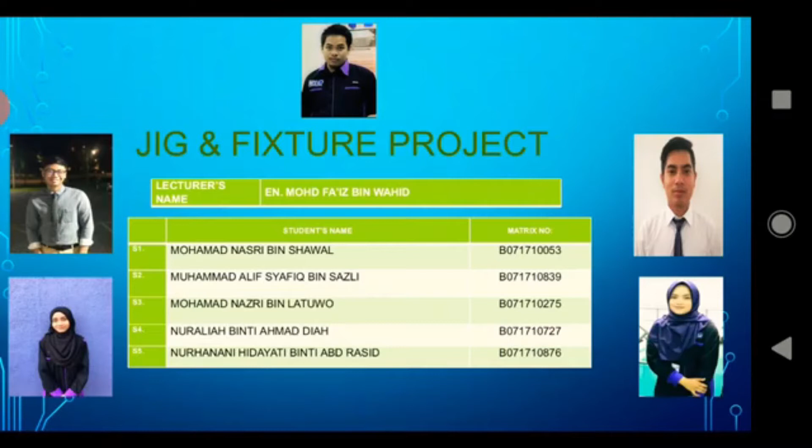Firstly, our introduction. Our group members have shared ideas on the work holder design for the final project. Locating and clamping are the critical functions of any work holder. As such, the fundamental principles of locating and clamping, as well as the numerous standard components available for this operation, must be truly understood. To perform properly, a work holder must accurately and consistently position the workpiece relative to the cutting tool, part after part. Group members demonstrate support for one another as they accomplish their goal.

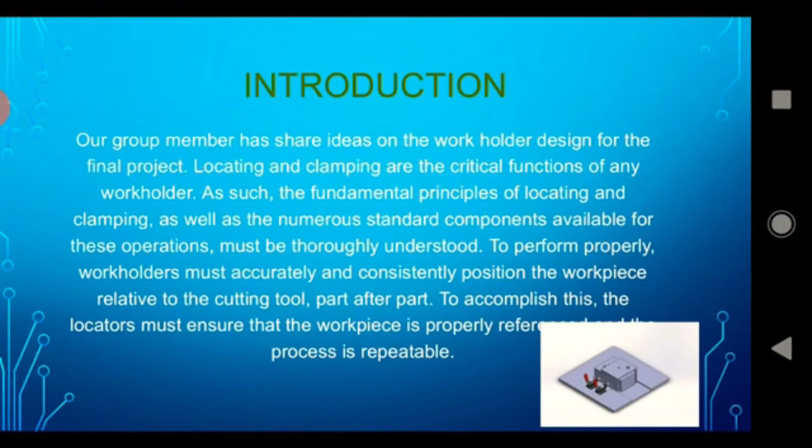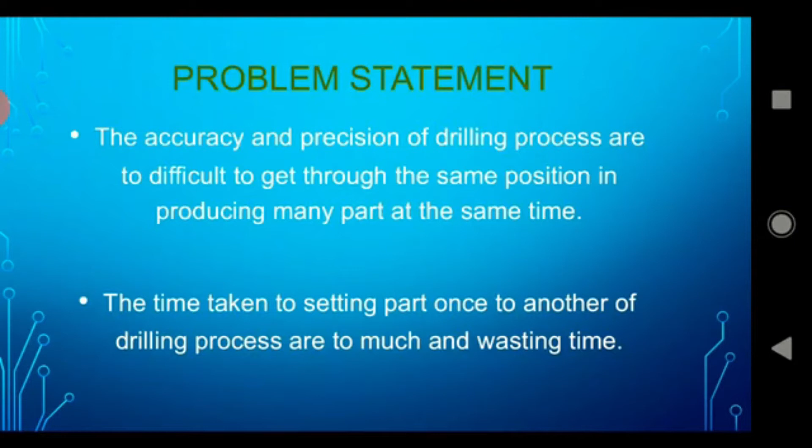Okay, this is our problem statement. As you can see, accuracy and precision in the drilling process are very difficult, as is producing the same position across many parts, and the drilling process takes too much time. Okay, this is our objective. First, produce a jig product that makes the drilling process easier with high accuracy and precision. Second, the time taken for the drilling process is reduced by using the jig and fixture.

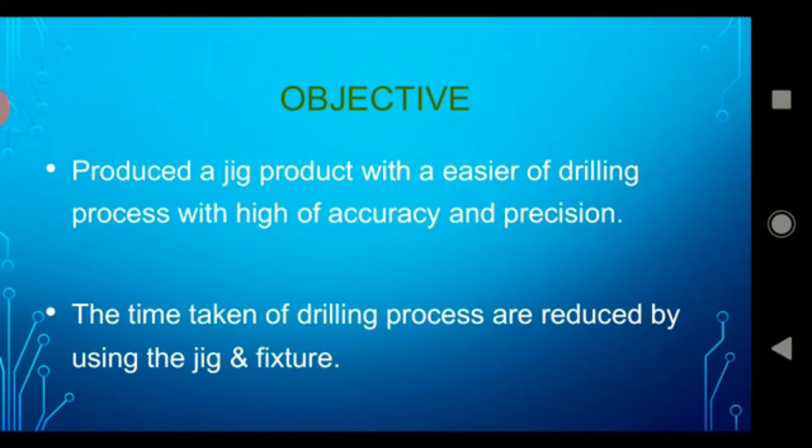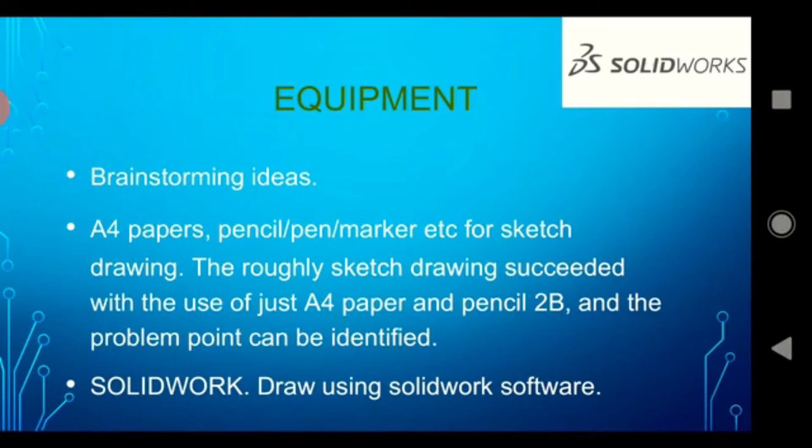Before we start, we did brainstorming and a meeting to manage and develop our ideas on how to make a better jig and how to achieve our project. Then we did the sketching using A4 paper and a 2B pencil, and then the final drawing using the SolidWorks software.

Okay, for the procedure, conceptual design for the jig needed is done by sketching for the workpiece that had been chosen. The sketch is done by following the assembly view and the custom part labels, which are the main body, locators, supports, clamping, and more. Then we do a real drawing in SolidWorks software to describe each component properly.

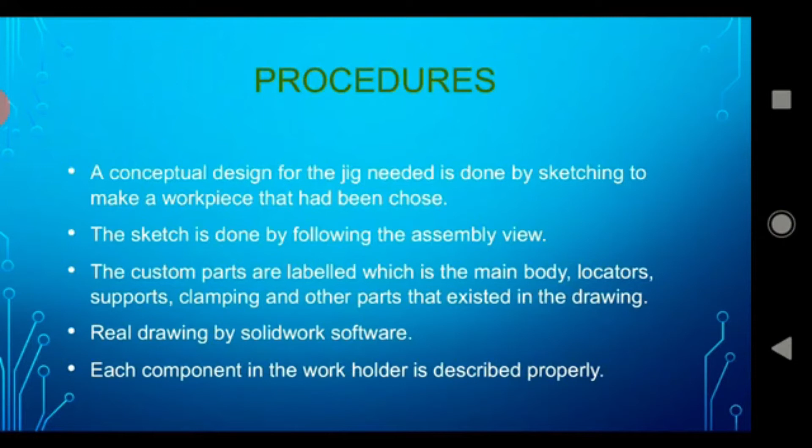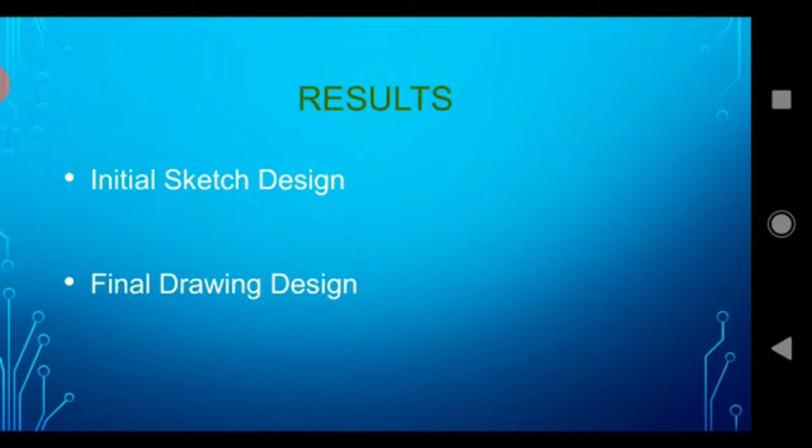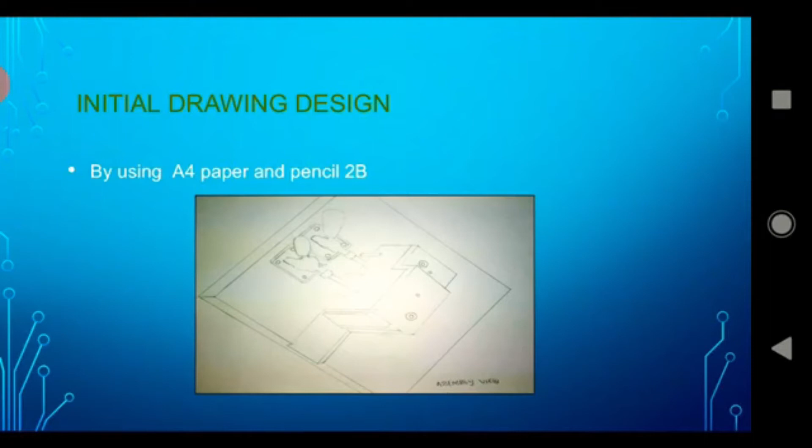Okay, for the result, we have two results. The first is the initial sketch design, which we did using just a 2B pencil and A4 paper. This is our assembly view. As you can see, the rough sketch, the first idea. This is a type of box jig. And then this is the cover side.

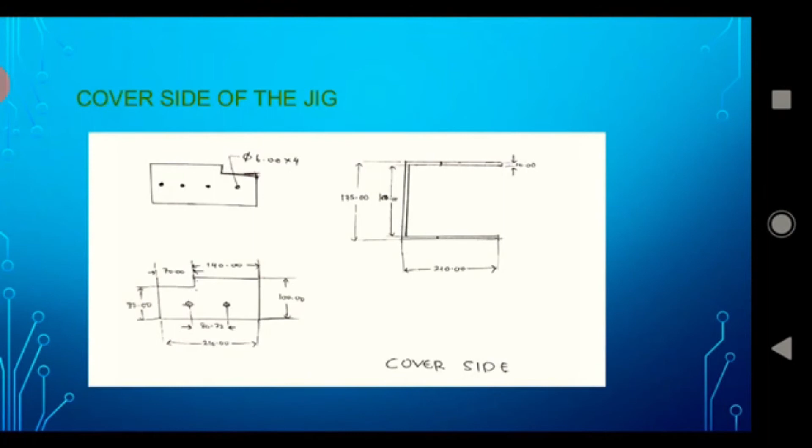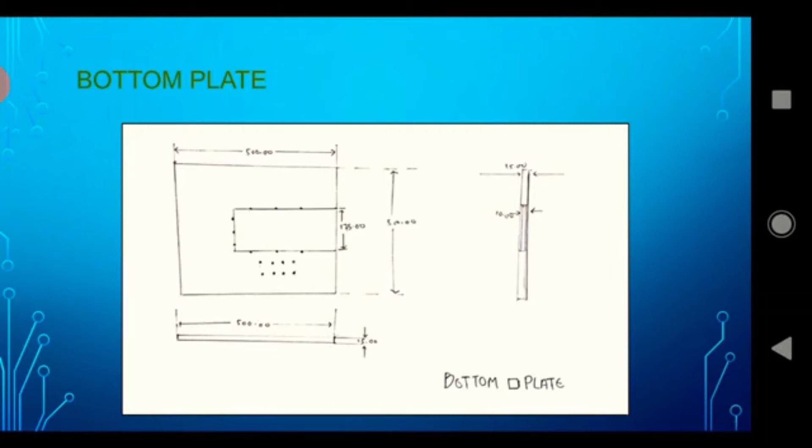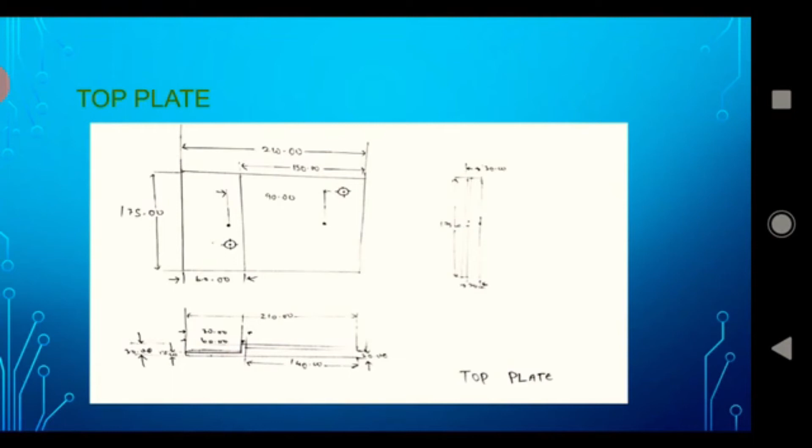For the precision and accuracy of the workpiece, we did the sketch for the cover side of the jig. As you can see, the width, the height, the diameter of the bush, and the others. Then the bottom plate, we use a normal sketch of 500 mm, and for the slope of the side, 500 mm. And then the top plate, we also just did a rough sketch.

And then the final design. This is our final design using the SolidWorks software. We have 9 parts of the jig and fixture, the box type. The quantity for the bottom plate is 1, bush drill 2, clamp assembly 2, cover side 1, screw 8, seating pin 2, stepped dowel pin 9, supporter 4, top plate 1.

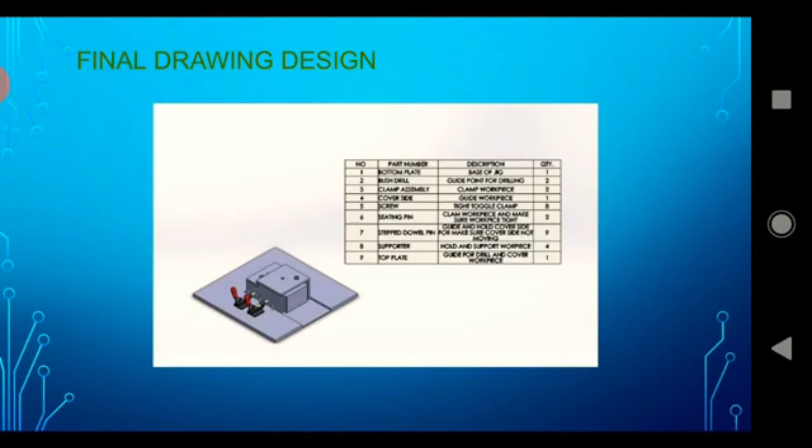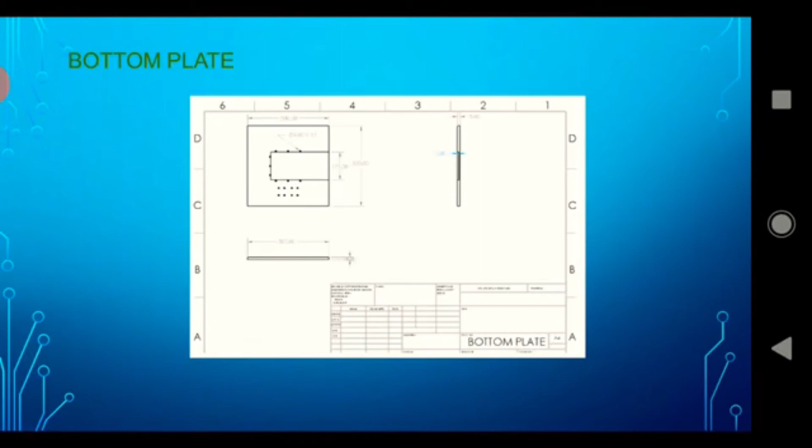For the bottom plate, 1 quantity, it is the jig base and the place of the part during the process. This is the main body, a custom part, as shown in the SolidWorks drawing. Next, the bush drill and the clamp assembly. Bush drill, 2 quantities, guides the movement of the drill during the drilling process; it is a support component and a standard part. The clamp assembly pushes and clamps the part during the drilling process, used as a clamp, and is a standard part.

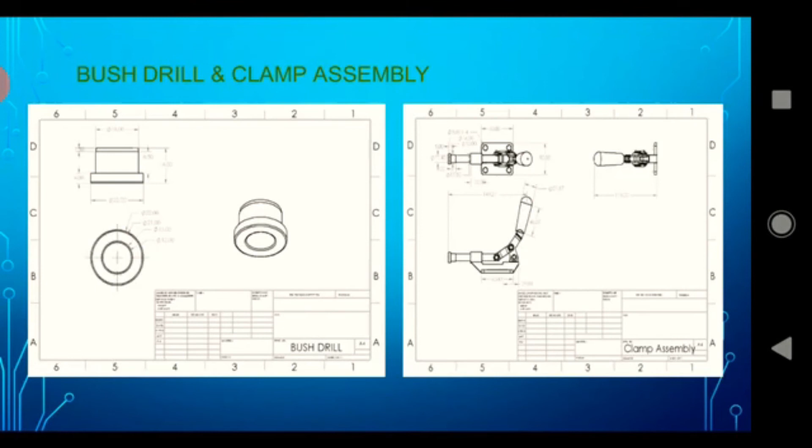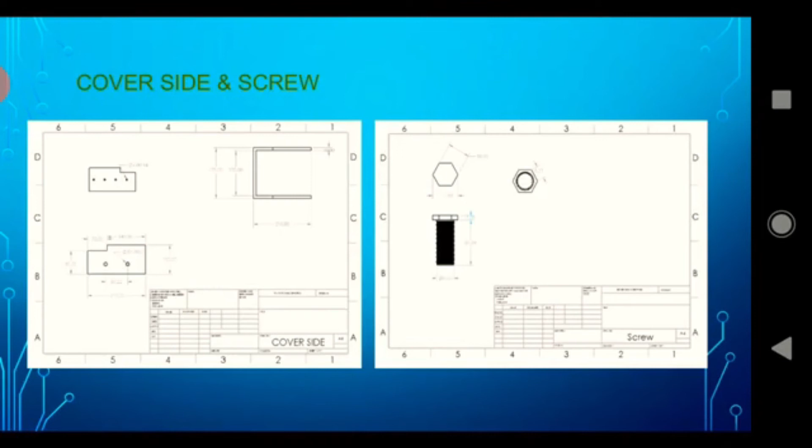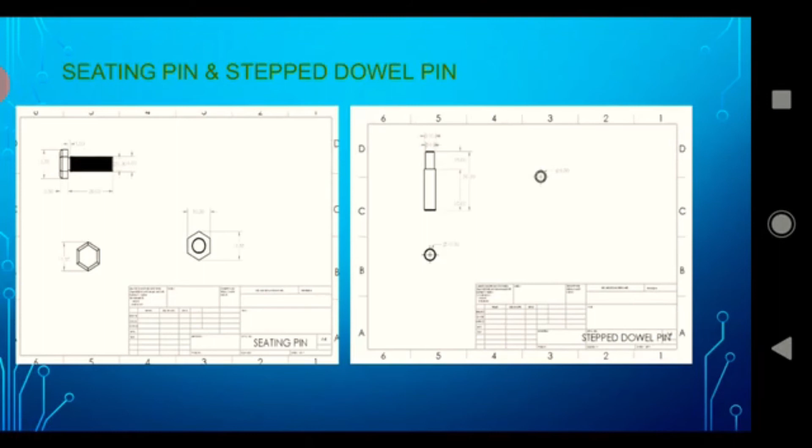For the cover side, the component holds the part and makes sure the right position is kept. This is a main body, and a custom part. For the screws, we have 8. The seating pin is used to clamp the part during the drilling process; component type clamp, standard part. The stepped dowel pin gets the cover side in the right position; component type support, standard. For the top plate, it provides the hole for the drilling process; main body, custom.

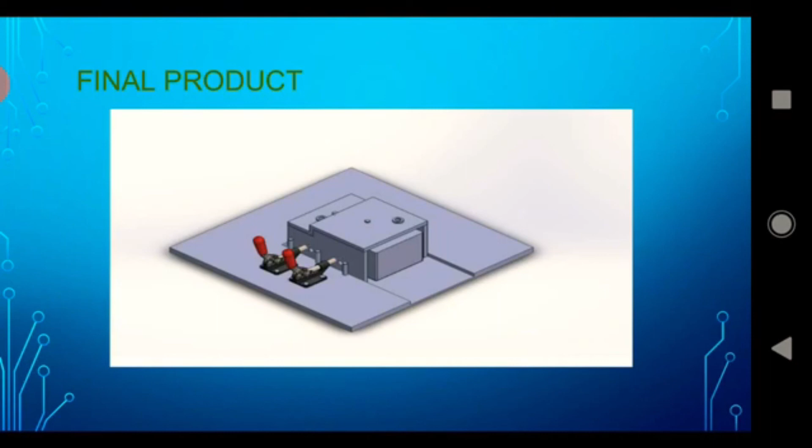We chose to use dowel pins rather than screws, as a dowel pin makes a stronger joint than a screw. The dowel pin cannot strip easily when the dowel joint is set up with glue. It will lock the workpiece in the jig, so the workpiece will not easily move.

As a conclusion, we were able to set up the work holder design for the final project by brainstorming ideas with all the team members. The objective of the project was achieved, which is to produce a jig product that makes the drilling process easier with high accuracy and precision. The time taken for the drilling process is reduced by using the design. The type of jig designed was a box jig. Clamping allows the box jig to locate the part with a high degree of accuracy and repeatability.

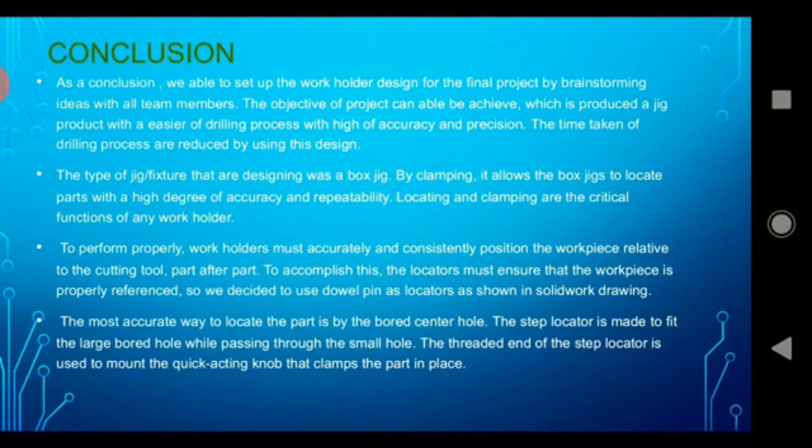Locating and clamping are the critical functions of any work holder. To perform properly, a work holder must accurately and consistently position the workpiece relative to the cutting tool, part after part. To accomplish this, the locator must ensure that the workpiece is properly referenced, so we decided to use the dowel pin as a locator, as shown in the SolidWorks drawing. The most accurate way to locate the part is by the bored center hole. The locator is used to mount the quick-acting knob, to clamp the part in place. Thank you for listening.